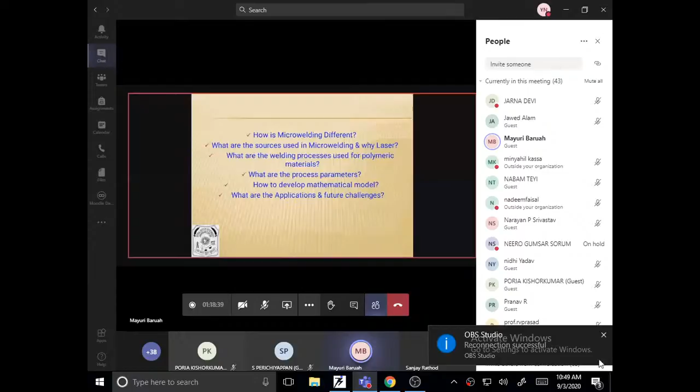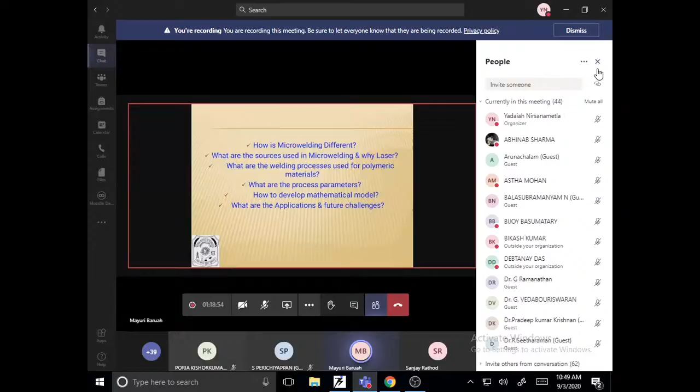Welding and micro-welding. So what exactly is micro-welding? Then the different sources of laser which are utilized for micro-welding. Then the process of joining polymeric material through laser welding. Then the process parameters, the optimization of the process parameters, and the effect of the process parameters.

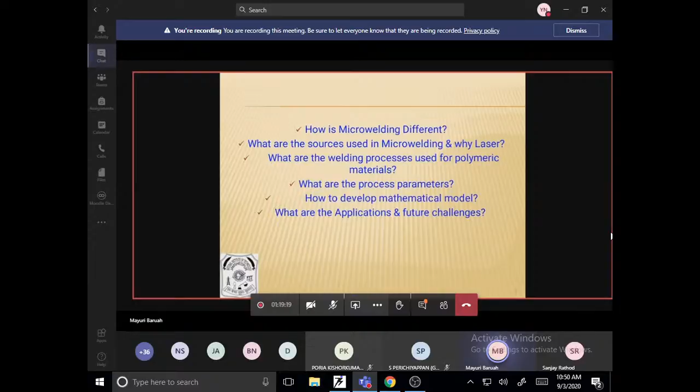And then I will cover the basic theoretical background of how to do the simulation of the welding process. And at last, I will be describing the present applications and the future scope of laser in welding. So coming to micro welding, first let us define what you mean by micro joining.

As we know, with the increased miniaturization of products, all products are becoming smaller day by day. People prefer using lighter products. They prefer using smaller products. So, therefore, we get the demand for a suitable technique which can join these micro thin products. Joining these very small products is very much a necessity. So people are opting for more and more techniques.

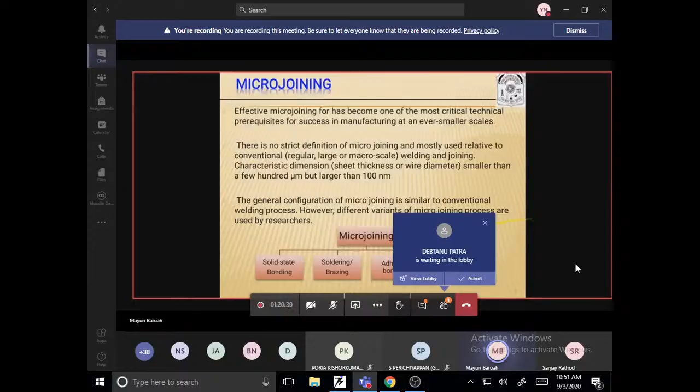The techniques highlighted in the slide are solid state bonding, and adhesive bonding. Then soldering and brazing, which is also one of the suitable methods. And the last method is fusion welding. So today my topic will mainly focus on fusion welding by laser, how it is accomplished through laser.

So first let us understand what is meant by fusion and what is meant by micro welding. Fusion is nothing but melting. So here the joining is done by melting two or more materials to form a solid joint. So what do you mean by micro welding? Now coming to micro welding, it is defined.

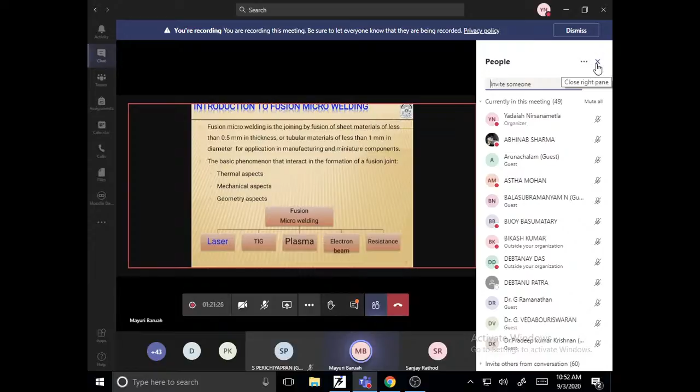It is not very different from the conventional welding that you know. It is only that the variants, the process parameters, the machine used, and the bead formed are smaller than the conventional one. And with it, the underlying physics of welding also changes to a certain extent. So, micro welding can be defined by 3 major parameters.

Another parameter by which micro welding can be defined is the type of weld that is formed. Now, what do you mean by the type of weld that is formed? Because if you have looked into any welding process, the bead forms. Of course, the penetration depends on whether you're increasing the power or decreasing the speed.

But if you are seeing the bead, if the width, to be very specific, is less than 2 mm, a very small width, so if it is less than 2 mm, you can define it as micro welding. So this is the most important definition of micro welding, that is dependent on the final width dimension. So it will be a very small bead.

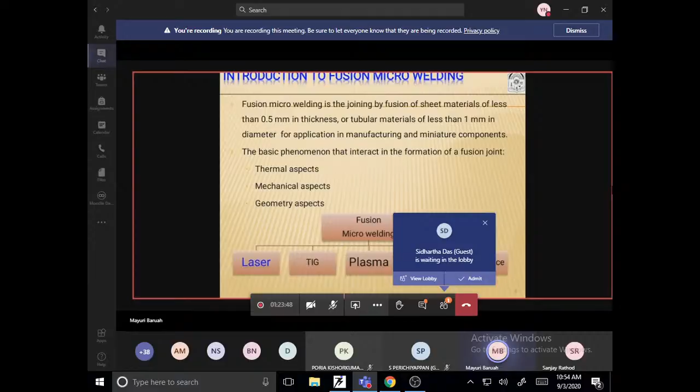Now, joining a plate with less than 0.5 mm thickness is also not very easy. So, the main parameters that you have to consider are the same. The laser power, the laser speed, the voltage, current, everything will be the same.

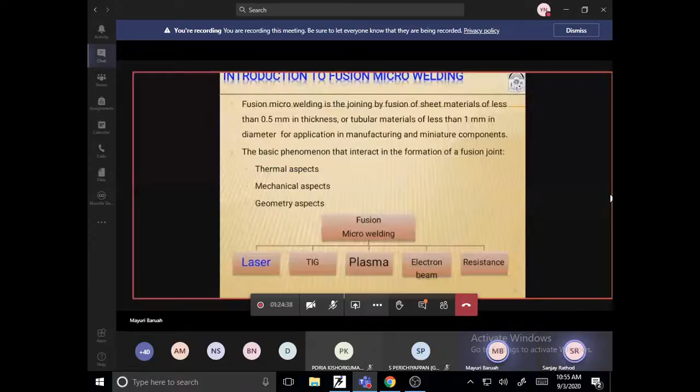Yes, but the thing is that smaller values will be used. Now, supposedly if the arc can be stabilized by using lower parameters, some machines do what? Some machines can bring up the arc but cannot stabilize it even at 10 ampere. If you see, even at 10 ampere, you cannot bring a very stable arc. The arc will be like that, then the next moment it may not come. It is not stabilized at all. So stabilizing the arc is actually the real challenge. Okay?

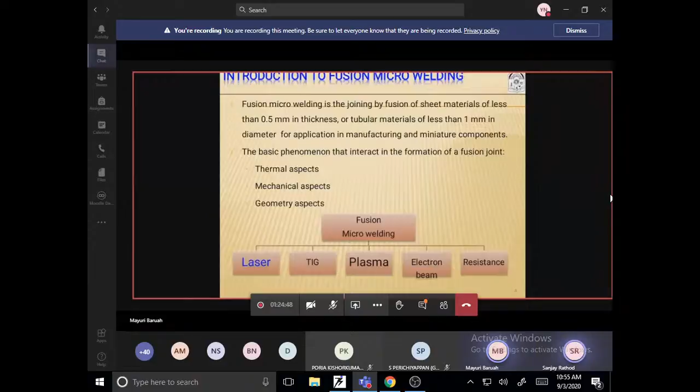So now let's come to why laser can be used as a micro welding process. Laser can be used as a micro welding process because of its very high energy density, that is, the heat input per unit area. Means the area is very small and the heat received is very high. So energy density of laser is very high, and thus it can be focused with a very small diameter, and thus it can be used to form welds of smaller dimension and to join thin plates. One of the most important things is that laser can heat the element in milliseconds.

And the heat affected zone. What do you mean by heat affected zone? The weldment is comprised mainly of the weld zone and the heat affected zone. The heat affected zone is the zone where melting has not taken place, but a change in microstructure has been encountered. And the cleanliness, the precision of the laser, and its ability to deal with complex parts have made laser inimitable for the micro joining process. Different lasers and different sources of laser are utilized for joining plates and tubular components of very thin dimension.

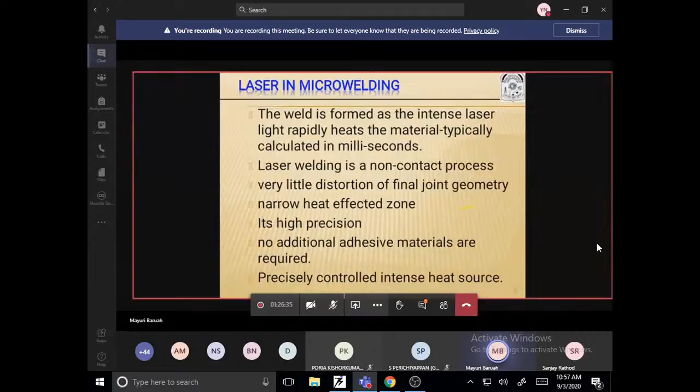Now coming to the application area of micro joining. Where is laser micro welding actually applied? It is applied to joining various things in the defense industry, in the aerospace industries, and also in MEMS. MEMS are nothing but microsystems, having biomechanical and electromechanical parts, the components that need to be connected.

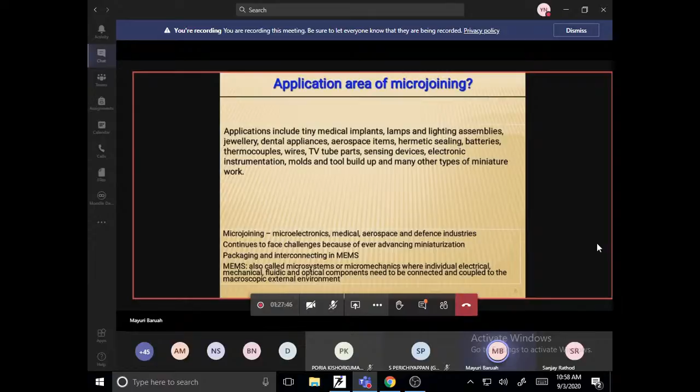Various materials. So laser, as we all know, its capability extends from welding, cladding, surface coating to additive manufacturing. So laser has no bound. Similarly, laser is increasingly applied in different forms for joining. Now, how does one laser source vary from another? It varies depending on material; certain materials can demand the use of certain different lasers. It varies on the weld penetration capability, it varies on

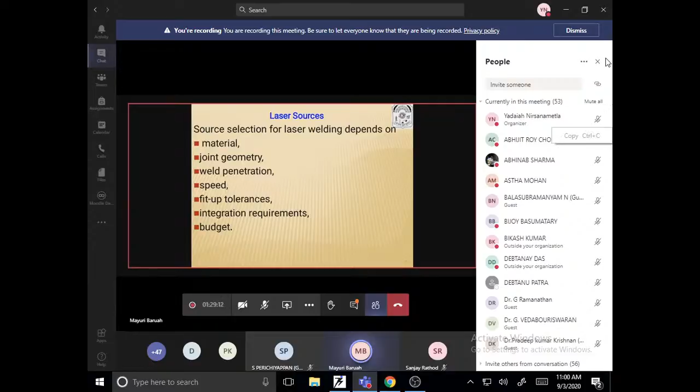So it has very good precision. That is, the fit tolerance is very high. But one effect with laser is misalignment. Slight misalignment in the joint of the two plates: since the focus area is very small, even slight misalignment may not allow proper joining. Also, laser needs intensive maintenance. Okay, so the equipment itself is very big and it needs very intensive maintenance. Otherwise, slight defects, slight ignorance can cause large damage, very big accidents.

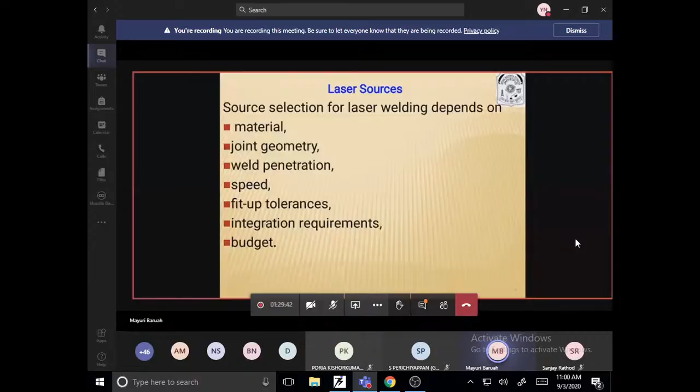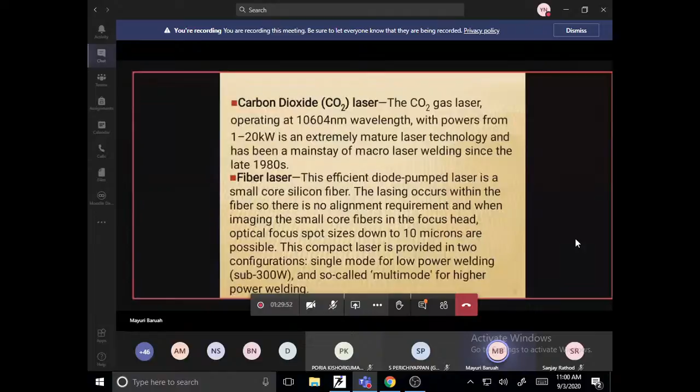But nowadays, if you Google it or try to see some videos, you can see handheld lasers, lasers that you can hold as a torch, which are increasingly applied. I think in your previous session they discussed the various types of laser: the carbon dioxide laser, which is a gaseous laser, the fiber laser, the diode laser, which is a solid state laser, and the Nd:YAG laser. All these lasers are available, but the most suitable laser for joining is the Nd:YAG laser, that too in pulse form, and the fiber laser, which has very high intensity, high energy density capability.

So, what do you think pulse means? I think all of you know that the laser is not applied continuously in the joining area, in the scanning area. For some milliseconds, the laser is not exactly stopped but maintained at a very low intensity so that its heat does not fall on the main area. So Nd:YAG laser in continuous form may not be suitable, but in pulse form, Nd:YAG laser can be effective.

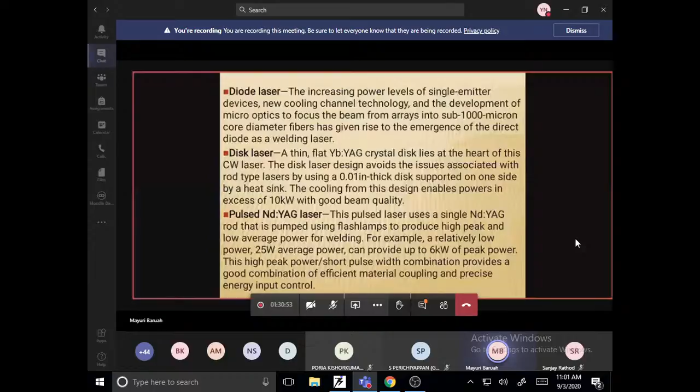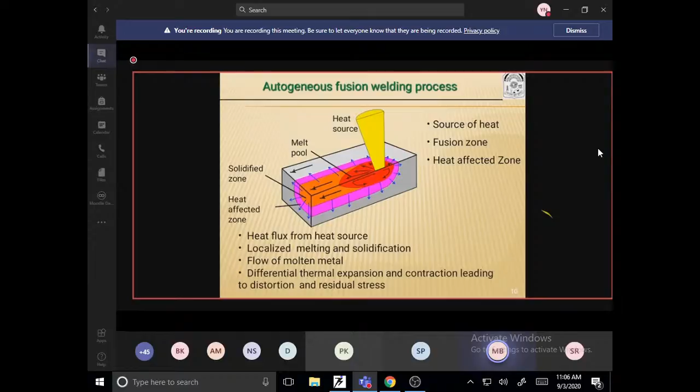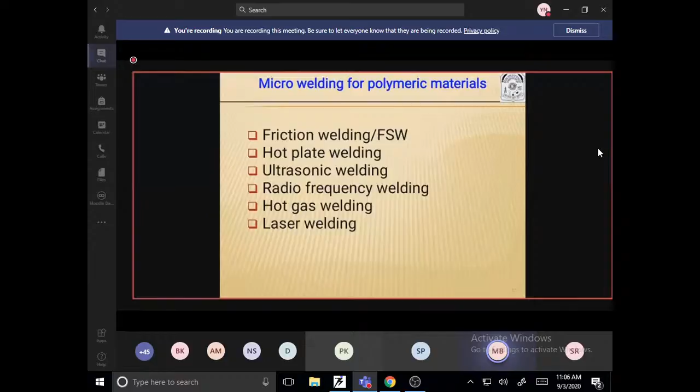What are the different technologies which can be utilized for joining polymeric material? One difficulty with polymeric material is its very low melting temperature; if it gets very high heat, it can vaporize very easily. So intensive control of the heat received by the polymeric material is very important. Friction stir welding has been utilized for polymeric material. Ultrasonic welding, where vibrations are given, is also utilized. This slide highlights some of the joining processes, but our main focus will be laser, which is increasingly applied for joining polymeric material.

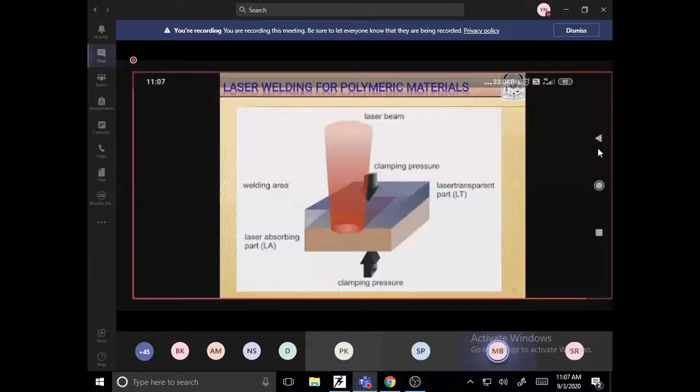Now coming to laser welding for polymeric material. Laser is nothing but a beam of light, and polymeric material, if it is thermoplastic, can generally be made transparent to light. As you have seen in the diagram, the upper part is transparent to the laser beam being focused. The laser beam has passed completely through the upper part and is then absorbed by the lower part. Now, if the upper part is transparent to the laser light, how is the lower part absorbing it?

The lower part represents something where additives have been applied, either carbon or a black coating. As we all know, black components absorb all the light focused on them, and white components reflect away the light. So the lower component has been given certain additives or coating so that it can absorb the light focused on it. But that is not always the case. Some of the light will definitely be transmitted through it and some will be reflected. So, light, what is it?

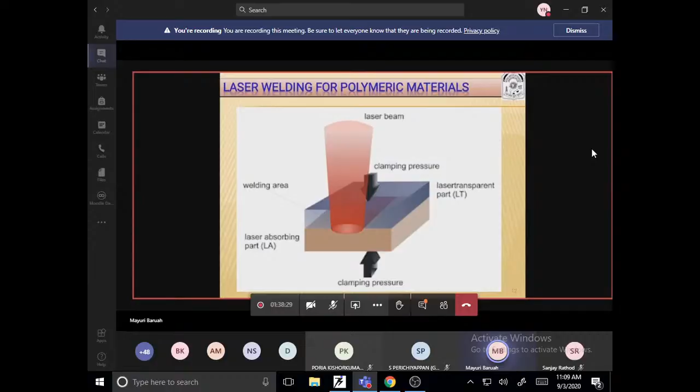So these are the various things you need to take into account. All lasers have different wavelengths, and the laser intensities will be different. The beam quality determines how much intensity there is, how much light gets reflected, and how much is absorbed by the component. This is one of the important capabilities you need to take into account.

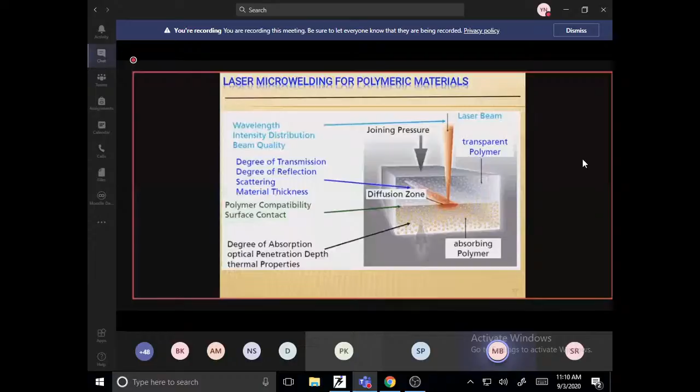The degree of transmission, degree of reflection, and degree of absorption - all these things define the weld zone in a polymeric material. So this is mainly understood here.

The two parts have to be clamped as tightly as possible to avoid any air gap between them, because the joining takes place at the melting surface of the two base materials. So if the upper part is transparent and the joining is done by heat transmitted from the absorbing part to the transmitting upper part, then a very tight contact between the two surfaces must be there. From the next slide we will understand it better.

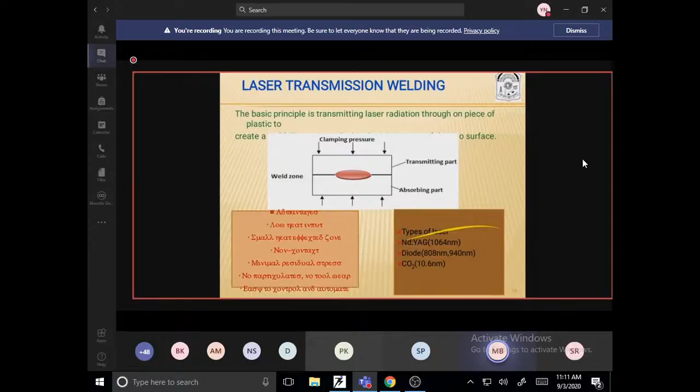Now you see, the laser is transmitted completely from the upper part and focused onto the lower part, and it has the weld zone - what does the weld zone describe? It describes the melting zone. After melting, the heat is transmitted from the lower part to the upper part.

From the upper part, the gap shown is nothing but a microscopic level gap - so not much of a gap is actually there. It is given just for understanding. By heating, the heat is transmitted to the upper part, causing some melting of the upper part, and then the final joining occurs. This is the main basics of laser transmission welding.

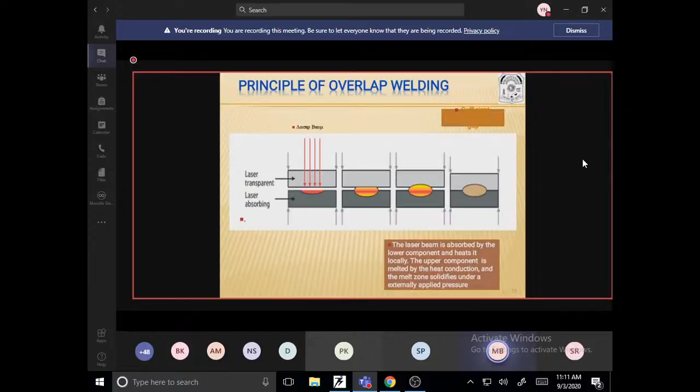Now, the degree of complexity of joining the transparent or polymeric material: if it is white on top and the lower part is the absorbing part, then it is the easiest way to join, because the white part will transmit almost all the rays conventionally, and the lower part will absorb all the rays.

This also depends - the lower part can be metals. It is not that this method is used only for joining one polymeric material with another; it can also be used for joining polymeric material with metals. The lower part can be the metal.

From the top part, all the rays will be transmitted and focused on the lower part. The lower part, being metal, will reflect some of the light according to its properties, and will absorb most of the laser light, accomplishing the melting, which is then transmitted to the upper part.

So this process can be used for joining dissimilar polymeric materials as well as polymeric material with metals. The lower part can be metal, or if the lower part is black, then the joining is most efficient. The difficulty arises when both parts are black - then the top surface will be absorbing it too. So some criteria require that the two materials differ in character, such that the top surface is...